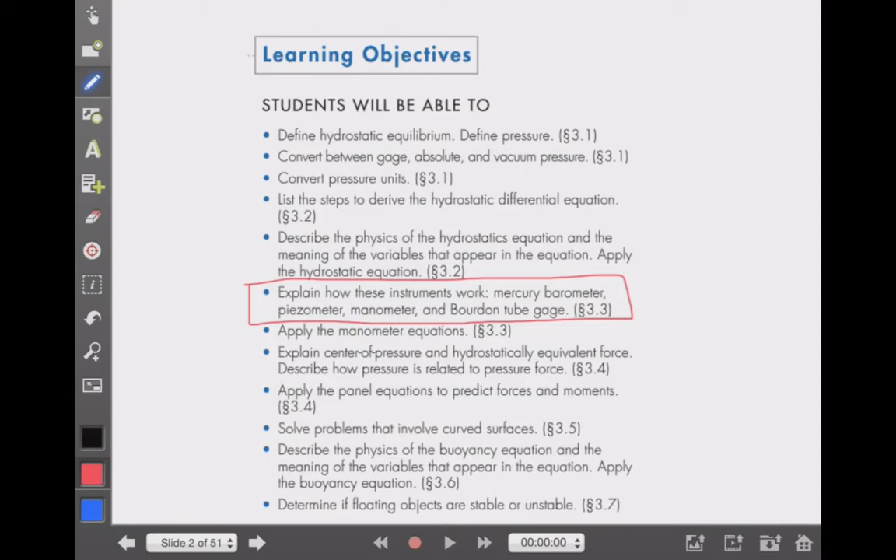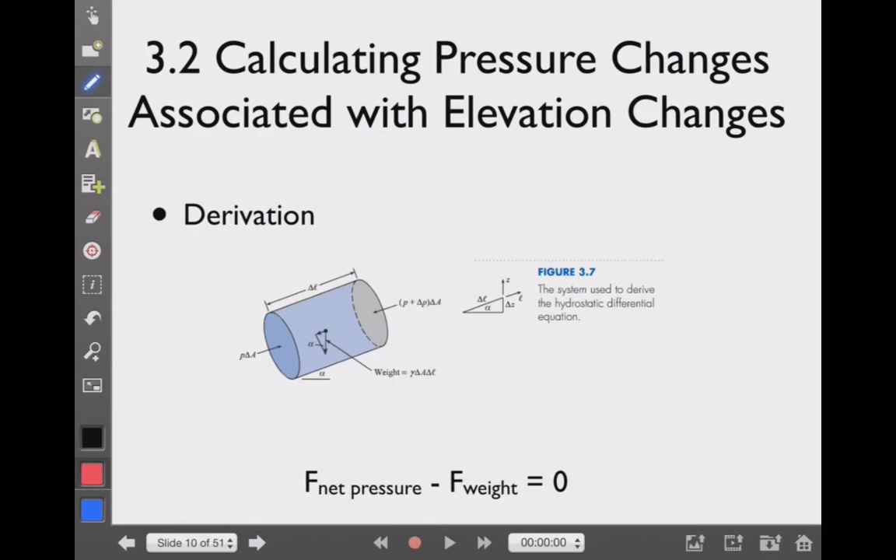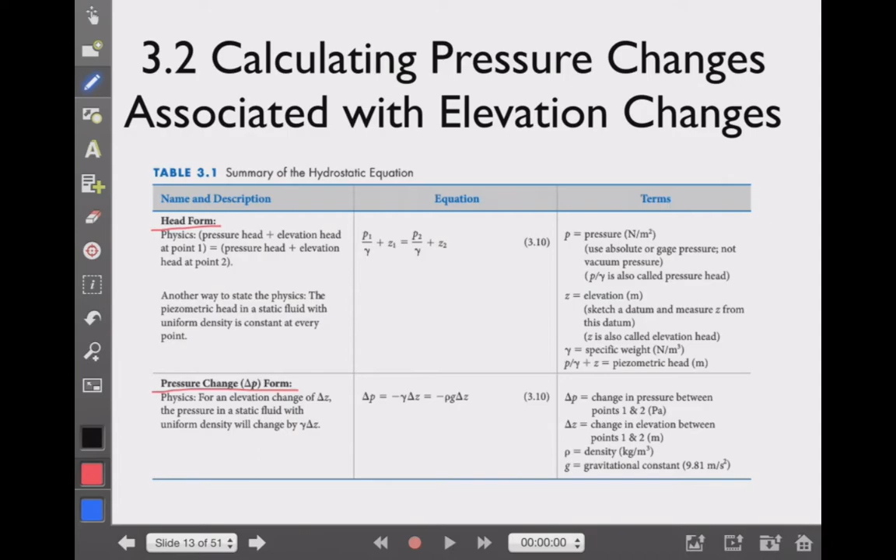So I'm going to just skip ahead through all of our discussion about pressure, hydraulic machines, and the hydrostatic equation, and I'm going to stop right here and make a note that we are going to use both the head form and the pressure form of the hydrostatic equation to understand how instruments work for measuring pressure. So here we are at the beginning.

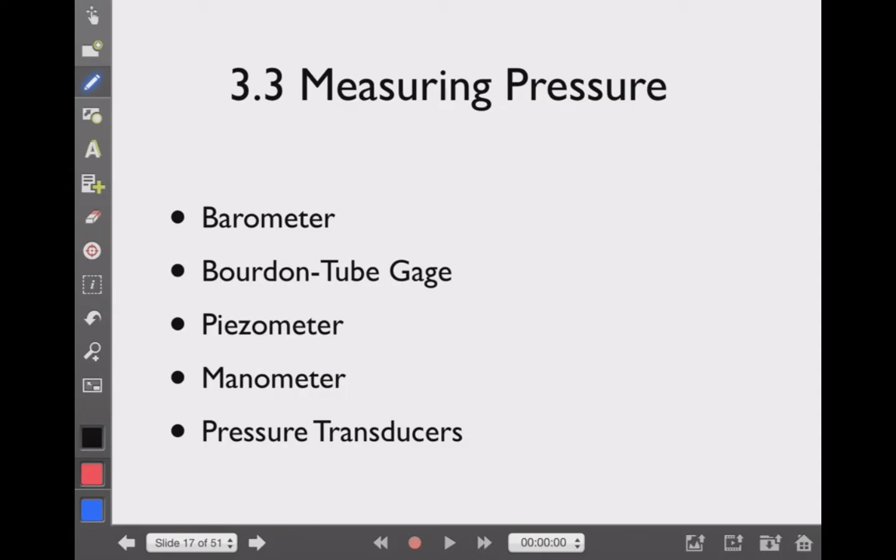There's a number of different types of instruments, and the first type is a barometer. This is pretty easy to understand. A barometer is basically a fluid, a working fluid. In this case, it's mercury. It's a mercury barometer. And there is a vat of mercury in basically a tub or a dish, and there's a closed tube inside here. And basically the height of this tube is going to be related to the pressure that's being enacted on the

surface of the mercury. So you can see atmospheric pressure is pushing down, and as that pressure pushes down in that liquid, the liquid goes up in the tube, and the height of the liquid is then going to be related to the pressure being imposed by the atmosphere onto the top of the liquid of the dish, the open

dish. Now, if we apply basically the pressure form of the hydrostatic equation, we get that the height of the column here, gamma of the mercury times the height of the column, is the pressure in the tube plus any vapor pressure that might be captured in the top here. But typically the gas pressure is much smaller than the liquid pressure, and so we can neglect it. So in this case, the atmospheric pressure is merely related to the height of the column, H, times the gamma of the fluid. In this case, it's mercury.

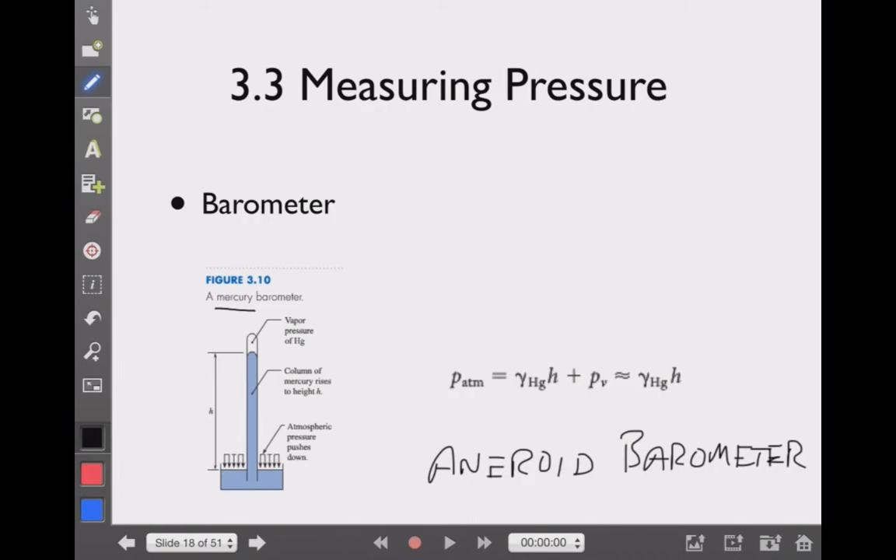Now, I did also want to mention, the book also mentions a second type of barometer called an aneroid barometer. And I don't have any graphics for that, but basically it's a similar type of thing where we have a coil that's responsive to atmospheric pressure. They're used a lot in atmospheric measurements, and that coil, when it flexes, more or less due to the atmospheric pressure, it turns a gauge. So I just thought I'd mention that as well, since the book mentions it.

Here's a Bourdon type gauge. A Bourdon tube gauge, and this instrument works on the principle that this tube, this blue part here, is basically a tube or a spring that responds to pressure differences, and as the pressure changes, this thing kind of flexes in or out, and the shape of the ring basically flexes and turns a dial, this pointer here, depending on the pressure. And you can see that this thing can be screwed into some sort of pipe, and the pressure then measured. And these are pretty good.

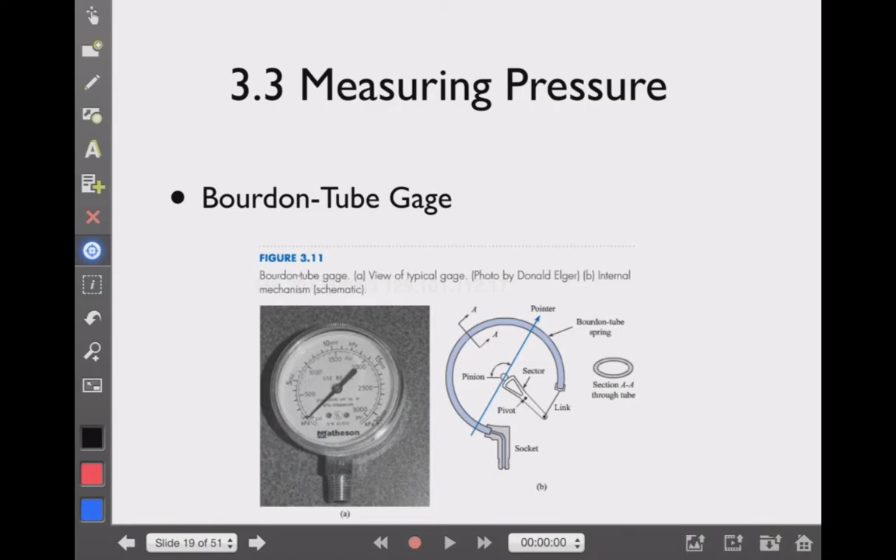They're very cheap, but they tend to wear out. If the tube gets used excessively, its elasticity basically will wear out, and so they need to be replaced. You need to be careful to keep them calibrated. And obviously at zero pressure, when the thing is disconnected, you can easily calibrate the thing by setting the needle to be zero pressure. At least you can calibrate it to zero pressure easily.

Now here's another instrument called a piezometer, which are quite important, and these are actually limited to low pressures, and they're hard to use with gases, but they're quite often used with liquids. You can see that this is just a tube that's basically tapped into a pipe that has some flow in it, and the fluid has a pressure in it. It might even be a pressurized pipe. And if you want to measure the pressure at the center of that fluid, you can put basically a tap in here, a piezometer.

And that pressure in that tube is going to be directly related to the gamma of the fluid, whatever it is, times the rise of the fluid from the center of the pipe to the top that you can measure here. And this tube will be at atmospheric pressure. So the nice thing about this is we can choose this to be at gauge pressure, which is at local atmospheric pressure, and that'll be at 0 gauge pressure. And we'll see in a minute that that's very handy to do.

So this is a very simple thing. We get the measure of the pressure at the center of the pipe. So manometers are kind of a similar thing to the piezometers, except that there are very many different types of these, and they all work on the concept that the pressure increases as the depth in the fluid increases, and the pressure decreases as depth decreases. So that should say decreases as well there.

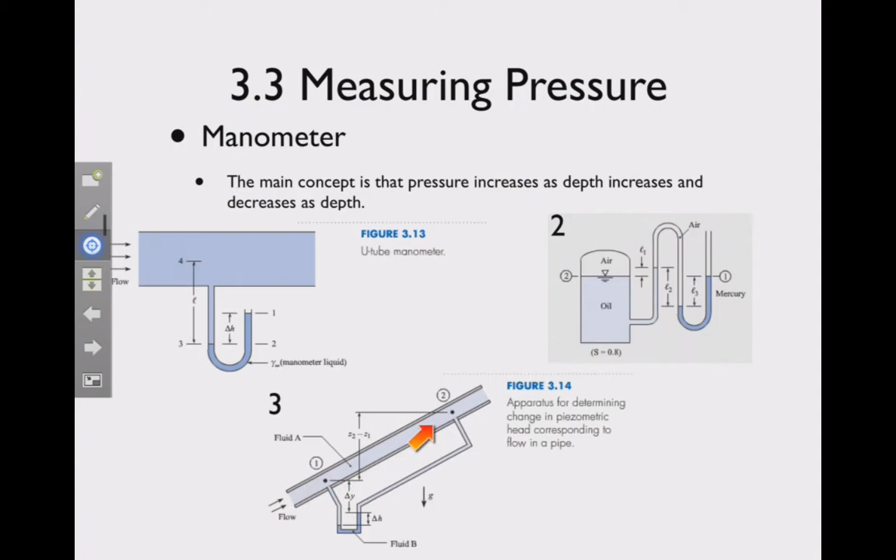And then also, this particular type of manometer is for measuring differential pressure at 2 points along a pipe. And instead of using the pressure form of the hydrostatic equation as we did in 1 and 2, we'll see in a minute that we use the head form for this, a very simple equation to get the differential pressure between points 1 and 2 in this picture. So they all really depend upon the manometer equations.

And the first one here, we're going to use this equation for a manometer that has an open end, that is, open to the atmosphere. And the reason why this is a good thing to do is because we know what the pressure is at that end. We usually set it to 0 gauge pressure at P1, and then all we have to do is add up the pressures going down in the fluid and subtract off the heights going up in the fluid, and then we get the resulting pressure. And I'll show you how to do that in a minute.

And then that differential gauge is going to use this equation right here, and we'll give you 2 examples of that. So let's do this first example. Water at 10 degrees is the fluid in the pipe. That's this fluid and also this portion right here. And mercury is the manometer fluid here. This is mercury, and it's an open end.

And we know that delta H is 60 centimeters and L is 180 centimeters, or 1.8 meters. So what is the gauge pressure in the center of the pipe? Now, the book shows you in gory detail how to go from point 1 to point 2 to point 3 to point 4. But what I'm going to do is just give you a more simple example of just showing you how to do it using the manometer equation.

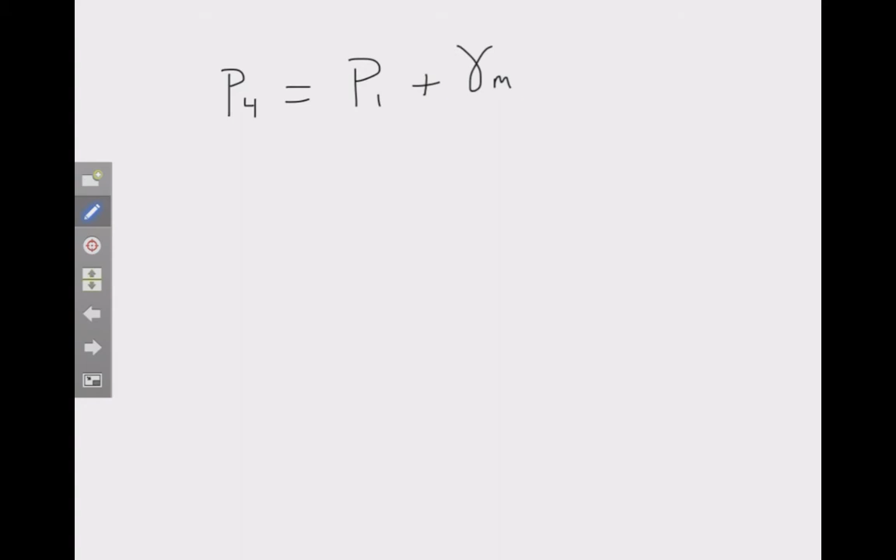So if we're interested in the pressure at point 4, remember that we can just kind of skip to having point 1 be the gauge pressure at the open end. So the pressure at point 1 is 0 gauge, and we want to know the pressure at point 4. That's going to merely be the addition. We're going to add all the heights going down. That's going to be the manometer fluid, or the mercury, times that delta H, and we're going to subtract off the fluid of the water, basically.

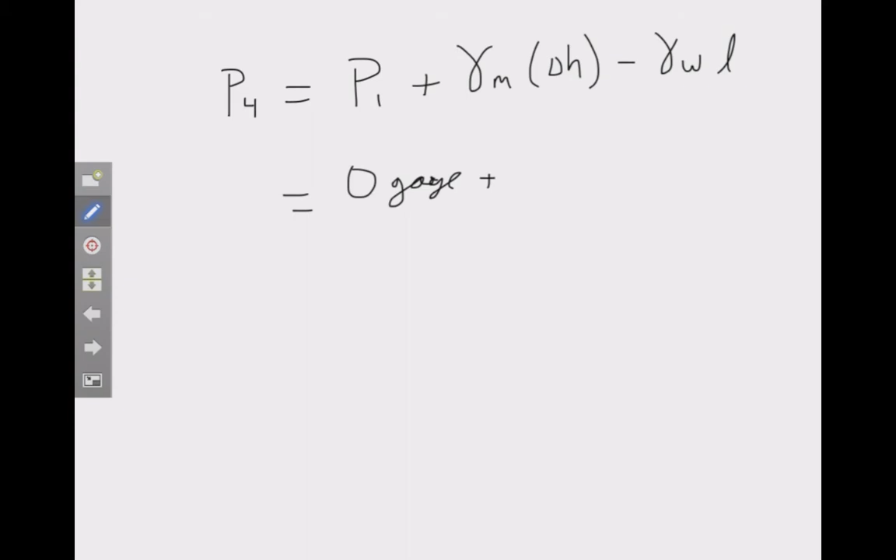So this is what we get, and we just plug in. And this is 0 gauge, so that's just going to subtract right out. The gamma for mercury is 133,000 newtons per meter cubed, and that's going to be multiplied by 60 centimeters, which is 0.6 meters. And this value came from table A.4 in the book.

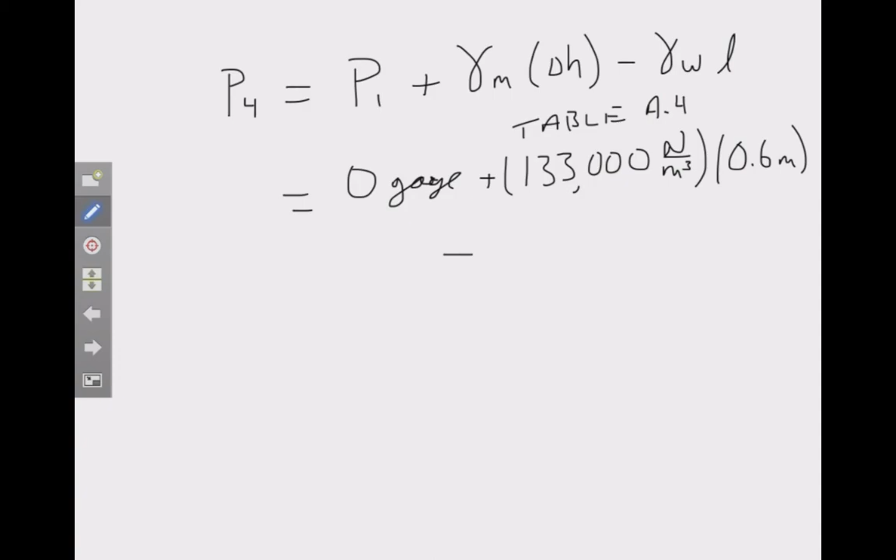And we're going to subtract off that upward rise in the fluid. We have to subtract this because this is basically a rise. We're going up. As we go around this tube from 0 around to this point, wherever we go down, the pressure is going to increase, and wherever we go up, the pressure is going to decrease. So we have to subtract off that decrease, and water is 9,800 newtons per meter cubed, and that's times 1.8 meters.

And notice the units are all going to come out to be in pascals, because, let me get a red pen, this meter is going to cancel one of these and make that a 2. That's newtons per meter squared, which is a pascal. Same for this. And the ultimate answer will actually be a gauge pressure, because we started out with a gauge pressure at the open end of the fluid.

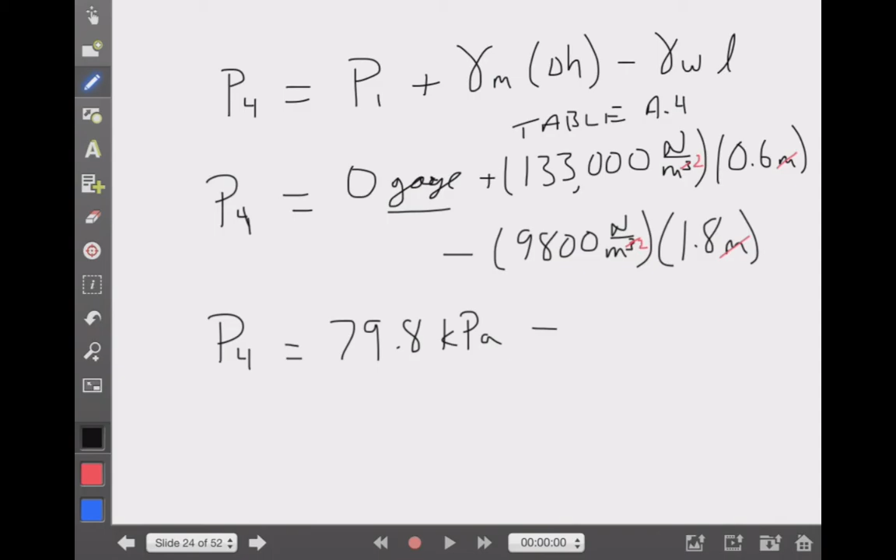So this is P4. And if we do the math here, multiply 133,000 by 0.6, we get 79.8 kilopascals. And we subtract off 9,800 times 1.8, which is going to be 17.7 kilopascals. And so P4 turns out to be 62.1 kilopascals gauge. And if you check the example, I think it's 3.6, you'll see that this is the correct answer. And it's a very simple problem if you apply the manometer equation.

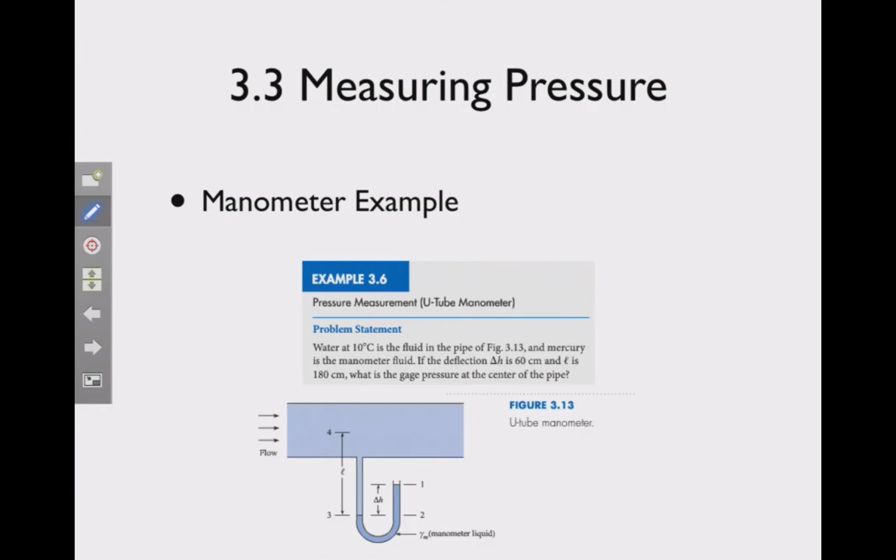So we will use the head form, and what we get out of that is that the head is going to be equal to the difference in those two heights, Z1 minus Z2. And that is going to be this delta H, that 1 inch, times the gamma of mercury over the gamma of water, minus 1. That's the equation.

And so H is going to be 1 inch, which is actually just 1/12 of a foot. We're doing this in traditional units, so it's 1 inch over 12 inches equals 1/12 of a foot. And again, from table A4, we get that in traditional units the gamma of mercury is 847 lbf, pound force per foot cubed, over 62.4 for water.

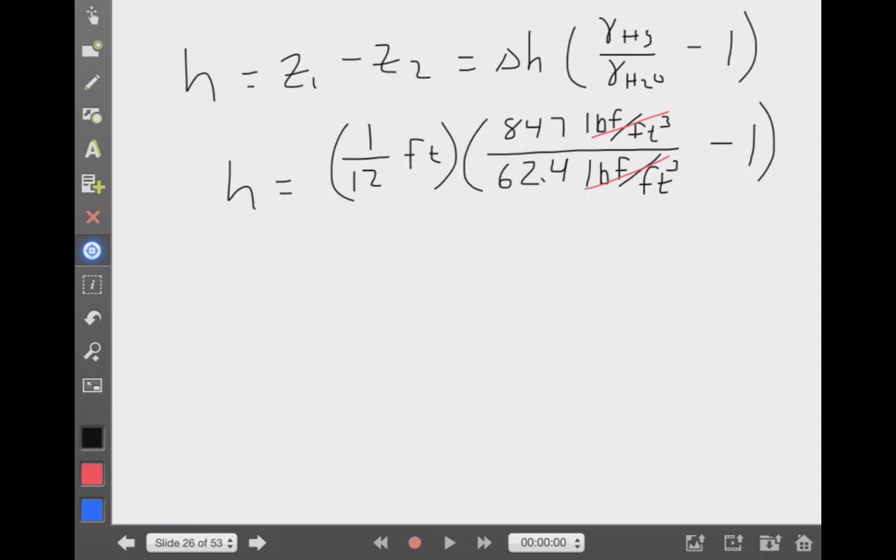And we actually know what this ratio is. We've calculated it before. It's a little over 13, but we'll write that down here in a minute. So what we get, note that these units cancel, and so this whole thing here is unitless. It's just numbers, and so our final units are going to be in feet. So H, which it should be because its head is in feet.

So we get feet for units, and we get, let me just do this right now, 1/12 of a foot, and this turns out to be 13.6, this ratio 847 over 62.4, minus 1. So we can see that we're going to have an answer that's close to 1 because this is actually kind of close to 12. 13.6 minus 1 is 12.6. It's just going to be 1 times 12.6 divided by 12. So in fact, the answer turns out to be just a little over 1, 1.05, and that's feet.

Now that's fine, but that's one thing that we wanted to know. This is the head. But we also want to calculate the piezometric pressure, and we get that by simply taking PZ is equal to the head times the gamma of the water, which is this. So we're basically determining what the head is of the water, the head change in the water, and the piezometric pressure in the water.

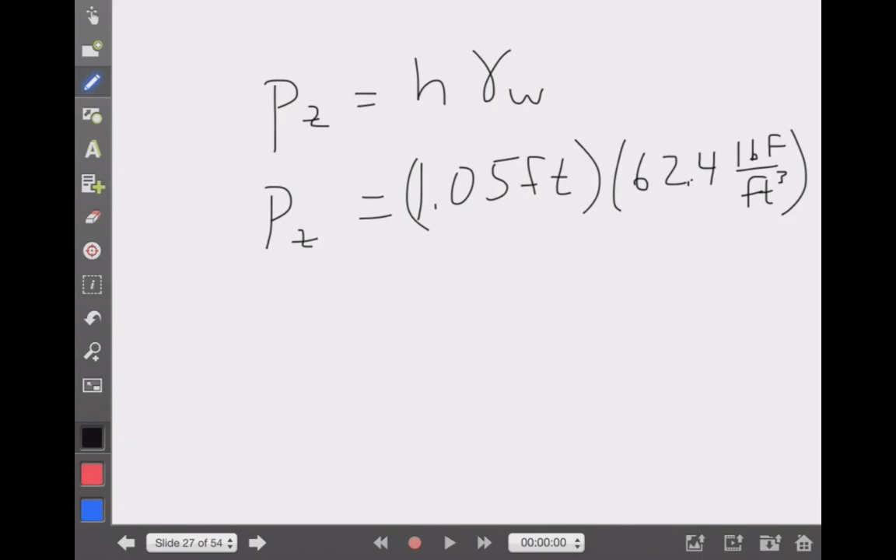So we have this. We know that this is 9,800. I'm sorry, we're going to do this in traditional units. 62.4 lbf per foot cubed. And this is now not a gauge pressure. Notice that this system here is a closed system. We don't know that these aren't open to the atmosphere, but this system is clearly not. There's no free surface here open to the atmosphere, so this is not a gauge pressure.

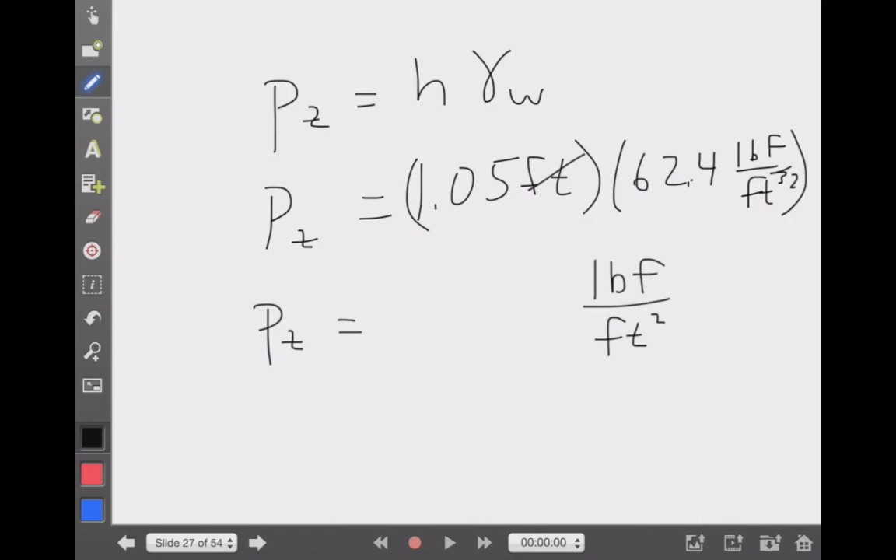And what we get for the pressure, the piezometric pressure now, is if we do these units, we're going to cancel one, and we're going to have basically pounds per square foot here. Let me just write that this way, just to be clear. I want to make sure that people are getting this. This is a pound force over a foot squared, and the numbers turn out to be 65 and a half. But this unit here is equal to pounds per square foot, PSF, not gauge either. So the piezometric pressure is 65 and a half PSF.

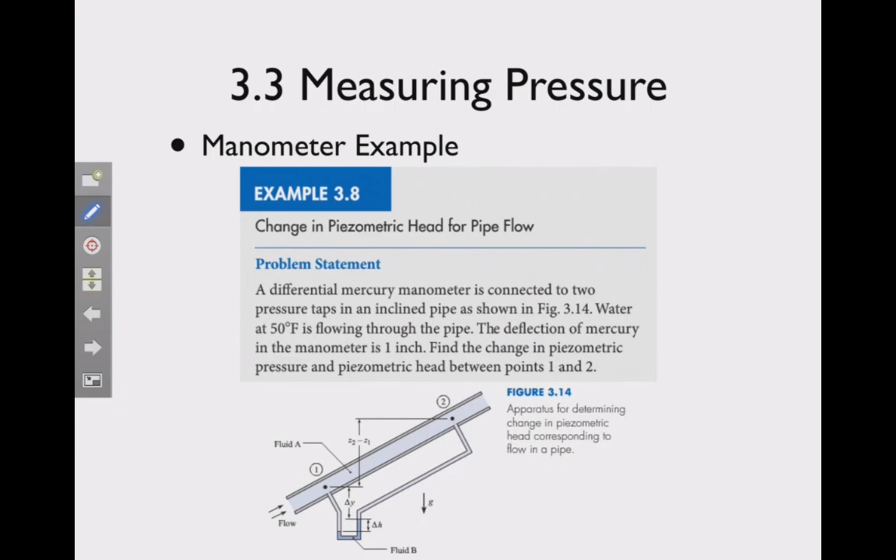And then finally, so that's how you deal with manometers, and we will do some examples of these in class. We'll do more problems like these in class, so you get a little bit more chance to work with these, and obviously you'll be doing some of these in your homework too. They're not too bad though, as long as we stick to the hydrostatic equation.

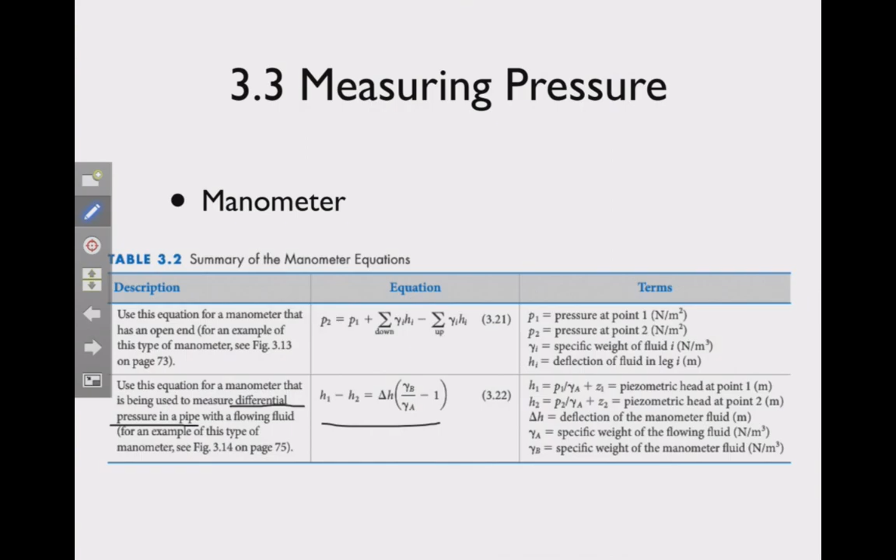So we don't have any examples of this. Obviously, in order to understand this, we would need to know how the strain gauge works and responds to pressure, and how the diaphragm works, and then how all the amplification works as well. So we're not going to do that. What we're sticking to primarily in this class are the fundamental equations here that relate manometers to the hydrostatic equation. So that brings us to a close at the end of section 3.3. And next time we will talk about predicting forces on plane surfaces.